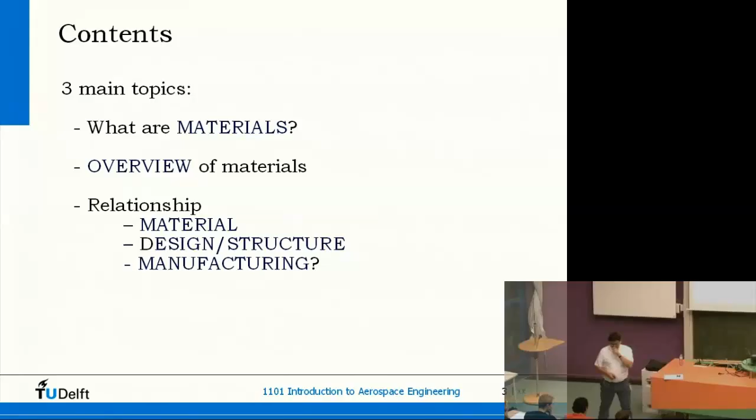Can we bring forward some kind of definition for it? What kind of materials are interesting, and then in particular for aerospace engineering? I also will tell a few things about different aspects of materials, like the properties, and how to design with it and how to manufacture with it.

And then you will see there is a close relationship between these topics.

First question: what is a material? Could you describe a material? Could you give some features of a material?

We need to provide, for one minute, what we need to build something. It provides a sort of skin for a skeleton of a structure that you have. Provides a skin for a skeleton or structure.

My question would be, the skeleton itself, what is that made of? Other ideas?

A collection of matter that makes up something. Collection of matter, yeah, essential things. Everyone knows when we're talking about materials what we mean with it, but how to formulate and how to express it can be rather difficult.

Basically, some specific density, strength, which can best do the job with. Material has strength, density, and so on. Yeah, density, weight, has some properties indeed.

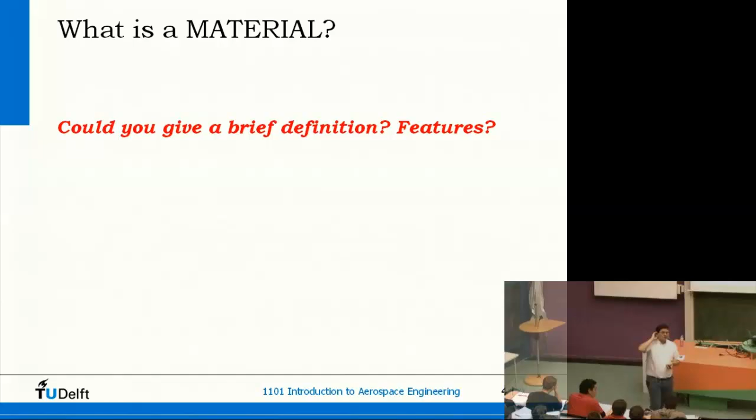Composition of elements, yeah. Well, actually, to give a very crisp and clear definition, that's rather difficult. Also, if you look into textbooks and also in dictionaries, it is rather complicated to find a very nice, very neat definition.

If we talk about materials, we often have to do with substances, with matter. All the properties which I've heard already, strength and stiffness and composition, those are related to that material, and it is not related to any geometry.

That's the difference, for instance, with a structure and a material. A material has substance, has properties, and a structure has substance, has properties, but these properties are also related to its dimensions.

We can talk, for instance, about the strength of a material. We can also talk about the strength of a structure. If we talk about the strength of a material, we can zoom in as far as we can, and still that material has the same property. For a structure, the strength is also related to its size, to its dimensions. A small structure has small strength, a large structure has large strength.

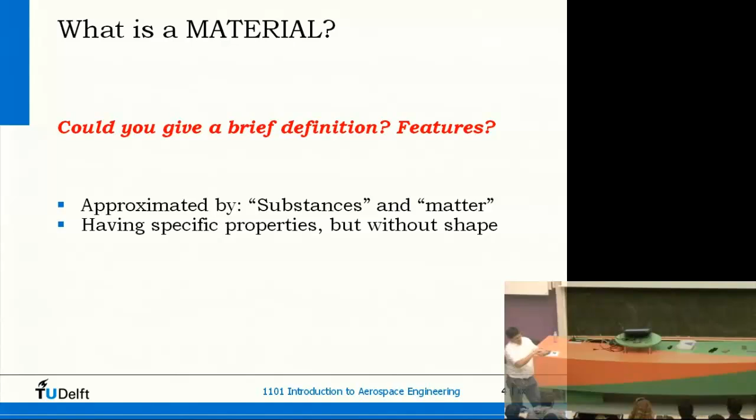Of course, matter always has at least some dimensions, but the idea is that if you talk, for instance, about the density of a material, however I make the size smaller and smaller, the density does not change. The density remains the same. Even if I have a very micro small portion of a material, it still has the same density.

If I have to calculate the weight of a structure, it's a collection of components. Components are made of materials. I will show in a few moments.

Okay, but realize sometimes we're talking about properties, as I will also for materials today. You find more or less the same names for these properties also for structures. But realize that difference.

Okay, well, here is a little bit your answer, I hope. Structures and materials are made from substances. Also, structures are made of substances.

The question is, how? Well, first, if we have materials, the materials are retrieved, for instance, from ore materials like metals, or are made artificially by oil refinements. And these materials can be big blocks, small pellets, powder, whatever form.

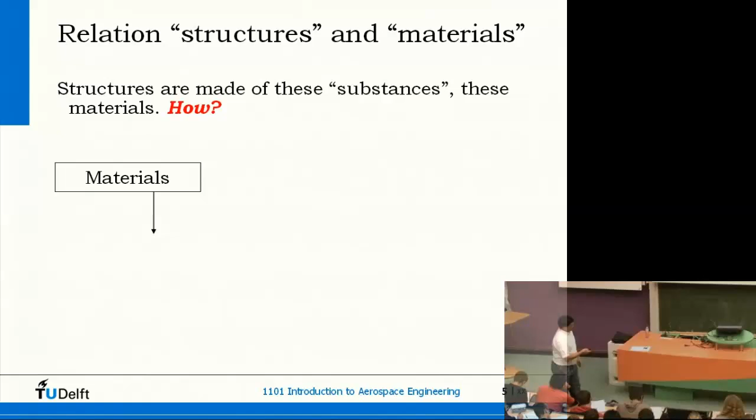These materials are transformed into so-called semi-finished parts. Semi-finished parts, think about, for instance, sheets, profiles, fibers, and so on. From these semi-finished parts, we are going to create components, structural elements.

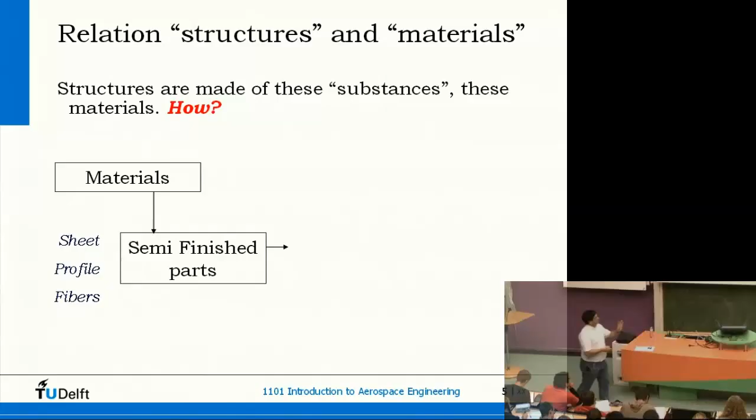And the structural elements can be a stringer, a beam, a sandwich. I showed some of them last time. And as soon as we assemble those, we obtain our structure. So yes, there is indeed a strong correlation between these two, but more or less via this route.

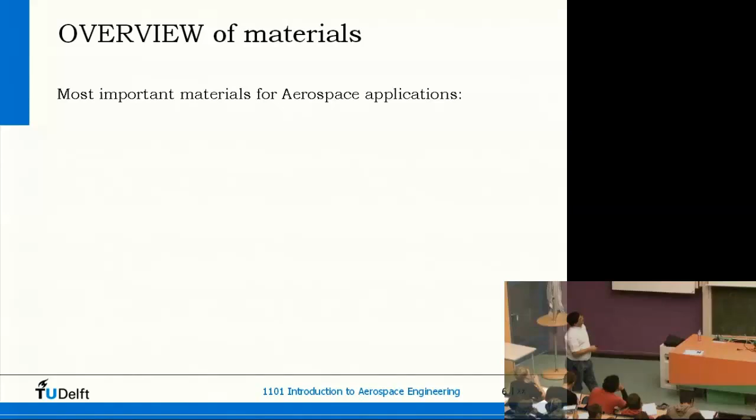Okay, let's zoom in a little bit in materials. If we look at materials, there are a number of main groups, to say so. First of all, we do have the metal alloys. Not all metal alloys are significant for aerospace, as you will see later on, but this is a very big group. It contains steel, zinc, lead, aluminum, magnesium, all kinds of metal alloys.

The other one, often used in aerospace, are so-called composites. A composite means composed of, you could say. It's composed of multiple materials, and I will tell later on how it is done. Fibers and resin, sometimes even metals are included, so then you have a hybrid material.

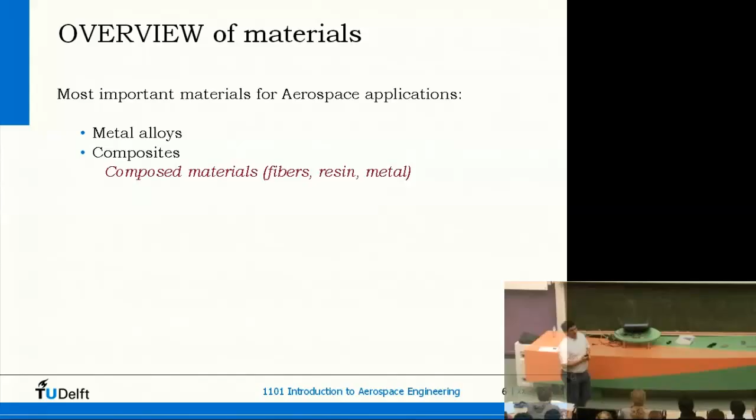Some things are made out of duraluminum. What is that, again? Duraluminum is some kind of aluminum alloy. If you look at aluminum, you have plenty of different alloys. Every alloy has its specific features, its specific characteristics. So things are not purely made out of aluminum. Pure aluminum is only used sometimes as a very tiny surface layer because it is very corrosion resistant. But the structure itself, the load-bearing structure, is always an alloy.

And duraluminum is one of them, but that's an old name. Nowadays we have much better alloys, I think.

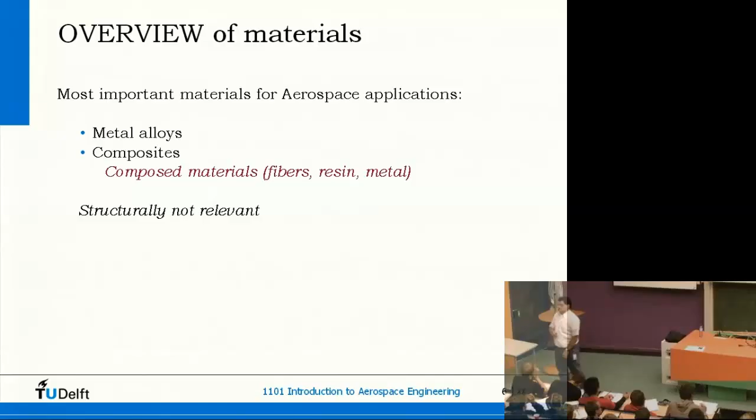Okay, other main groups are, for instance, the polymers and the ceramics. Both are, at least for aerospace, not really relevant, structurally relevant. If you look, for instance, at polymers, you have to think about plastics. Plastics are very nice materials for households, for gardens, for whatever, but you don't use them in highly loaded structures.

Then the strength and the stiffness of these materials is way too low. Ceramics, on the other hand, has another problem. As you can see, it is way too brittle. It is very notch sensitive, and it breaks very easily if you have a load which is not properly applied to a structural part.

I think I don't have any pictures from it, but remember one of the shuttles was damaged by a piece of foam which hit the leading edge of the space shuttle, and later upon re-entry, you saw that the whole shuttle disintegrated because the heat could come into the structure and so on. That leading edge was made of carbon-carbon, and that's a special kind of ceramics. It's very strong, it's very heat resistant, but it is also brittle. So if you have an impact in a very specific way, at a very specific place, it could crack, it could damage, it could puncture a hole in it, and that happens in that case.

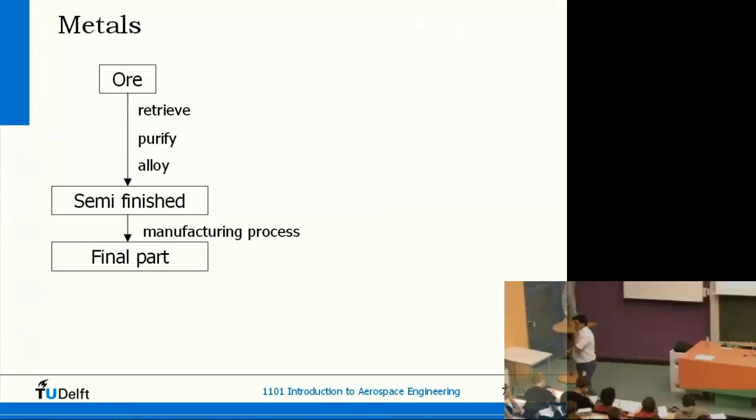Okay, let's have a quick look at some of these materials. First of all, I would like to look into metals. As we all know, metals are derived from ore, which are retrieved from the earth, like this one. Here you see some very big cranes gathering the soil, and later on it is purified and alloyed.

These two terms, purification and alloying - the first one, purification, means that you try to remove all the materials you don't need. So if you have, for instance, iron ore, which usually comes in pellets, small bits of rock where the iron is inside, you try to remove all the non-usable materials, so extract the iron from it. And all the phosphor and sulfur which comes with it, in many cases, should be removed. That's purification.

On the other hand, we would like to add a few things, in many cases, to get the right properties. There could be some chromium or some molybdenum or some carbon, whatever type of alloying elements we need - we put it in. So if we have a molten material, first of all we try to get out all the unwanted stuff, and then put in the stuff we want. That's the difference between purification and alloying.

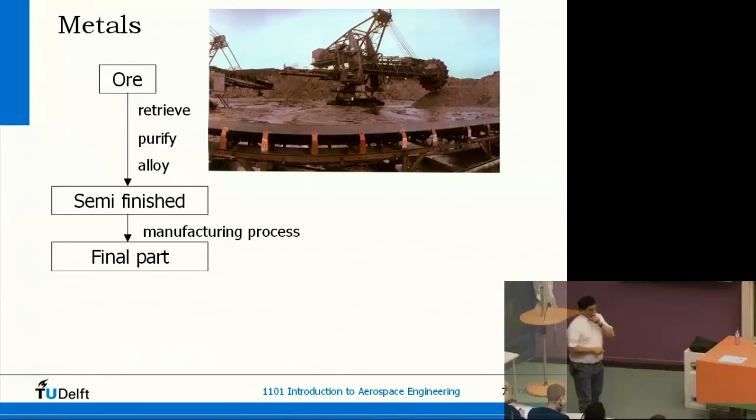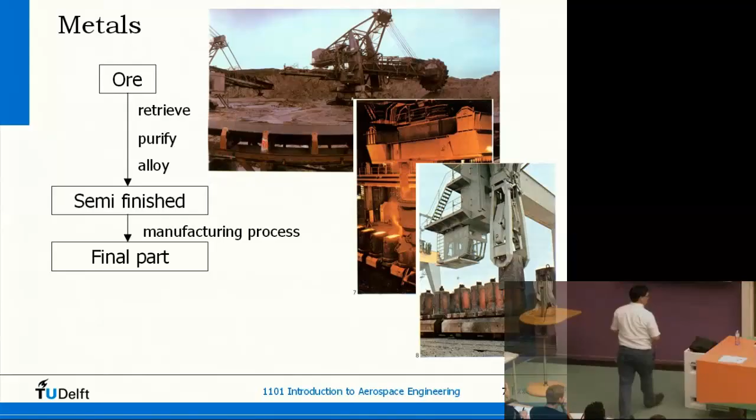After that we do have a semi-finished material, and in many cases it is first cast in very large blocks. Maybe I have to trim a little bit of light.

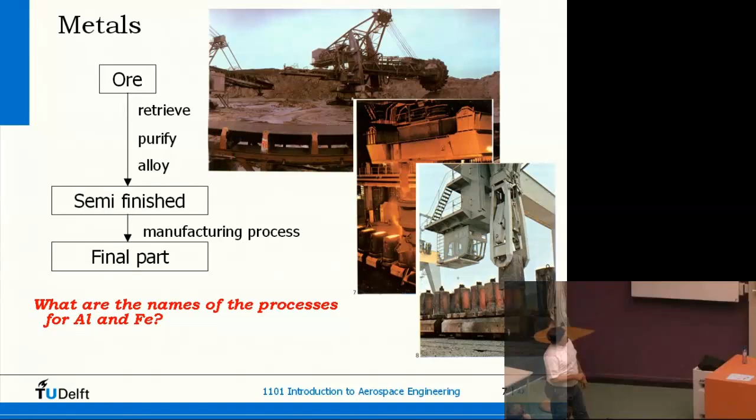Question: what are the names of these processes used for aluminum and for iron? Iron is the blast furnace. Blast furnace, yeah, for iron. I can't remember the proper name for aluminum, but it's electrolysis. Electrolysis, yeah. So indeed, blast furnace and electrolysis.

This is, by the way, a very energy-consuming process. In Holland, what you see for instance in Borssele, we have a nuclear power plant, and that was built there because next to it, in the harbor of Flushing, there was a very big aluminum plant, and a lot of that energy went into that plant. That's why it's also very important to recycle aluminum, because then you can get your new aluminum at much lower energy levels.

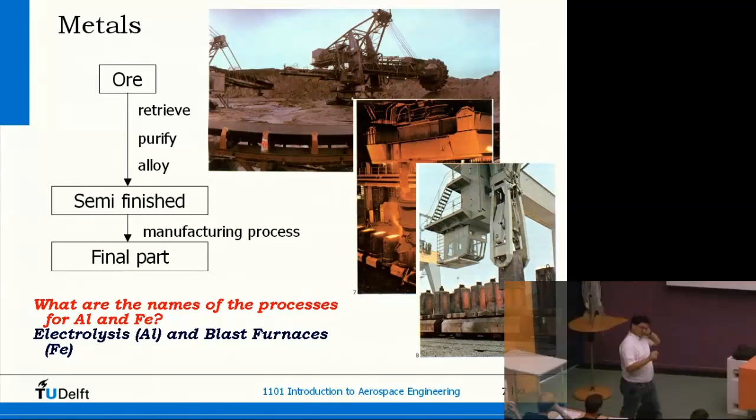Metals have a number of typical properties. First of all, most metals are isotropic. What's isotropic? Anyone know? Again, they keep their shape? No, that's not meant by isotropic.

Actually, isotropic means that the material properties are independent from the direction. So if I take a piece of material and determine the strength in this direction, it's identical as in this direction or in that direction. Same with the stiffness. Of course, the material is also homogeneous, so the density is the same everywhere. That means isotropic. Properties are independent from the direction which I take in the material.

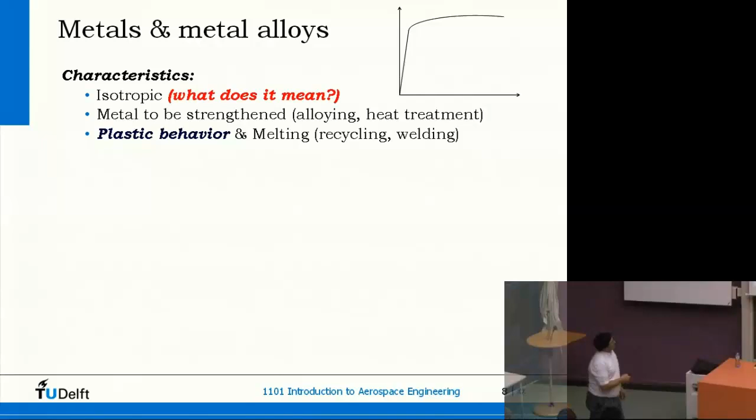Okay, most metals are indeed isotropic. The strength we obtain usually by alloying and heat treatments, putting in materials and doing some heat treatments, that will be told later. Most metals also show plastic behavior, and plastic behavior has a very beneficial advantage because we can shape a product from a flat sheet.

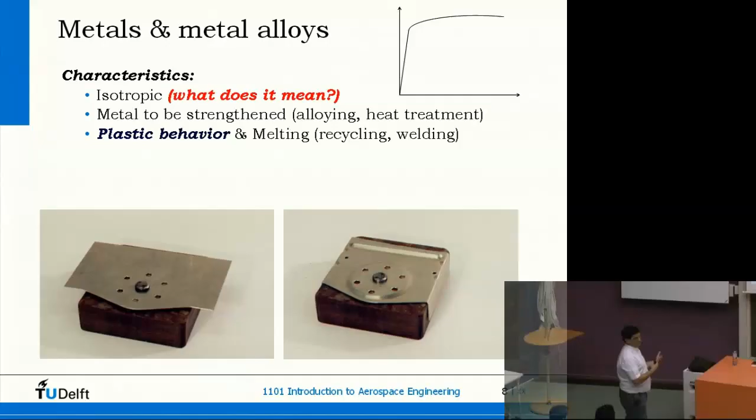Last time we said we operate our aircraft in the elastic area. Please don't go into the plastic area, because then you have a lot of troubles with flying around. But manufacturing is done in this part, so what you see here is related to the plastic area.

Metals can also be melted, can be made fluid, and this also has an impact on, for instance, recycling, welding, and casting. Good processability and often low cost - not all metals are cheap, but a lot of them are cheap.

Next slide, you see some properties of metals. Just to show you, first of all, the density has to be related to the weight. Then the Young's modulus - you already had some information about these properties or not? Some yes, some no. Well, it has to do with the angle of this one.

The steeper the curve, the more resistant the material to deformation, and the higher the Young's modulus - the stiffer the material. Stiffness means resistance to deformation, and the stiffer a material, the larger the force I need to give it some deformation. That's represented with this number. So steel has a high stiffness when you compare it to aluminum, and titanium, for instance, has some intermediate value.

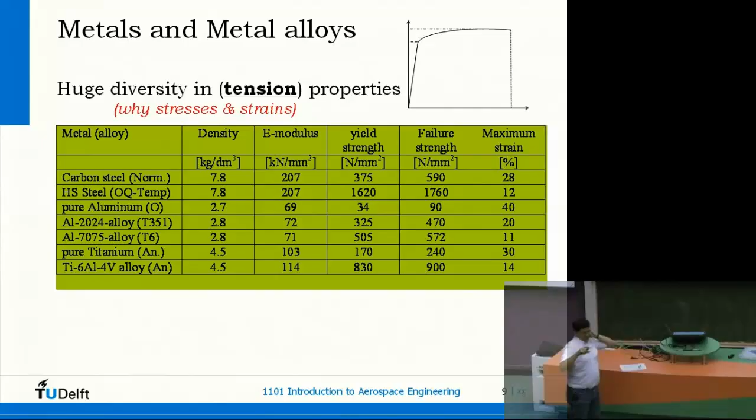Realize this is also only for tension. If you go, for instance, to bending or to compression, you can have different ratios, different formulas for the stress and the density. But for this simple application, pure tension, and I challenge you to look for it at home, simple tension, you can have stress divided by density.

If you do that, you find these numbers, and that's what we call specific values. Now what's very striking here is that, first of all, most of these specific densities and specific stiffnesses are more or less identical. If I go back, here you see large differences, but this large value is also divided by a large density. This is almost around 25.

But more interesting are, of course, these strength values, yield strength and failure strength. And now what you see, high strength is still maybe the highest, but not by that huge difference as on the previous slide. Titanium here is also coming very close, and also this aluminum is coming very close.

So now if I have to design a structure, I will not only look at these specific properties, but also look, for instance, at thicknesses. If I need a specific force and this ends up with a thickness of 0.3 millimeter, that's very thin, so that will be very vulnerable, for instance, by handling or impact. Aluminum probably will be about 1 millimeter if you compare it. Titanium maybe 0.6, 0.7. That's much more rigid, much more sturdy to impact and these kinds of things.

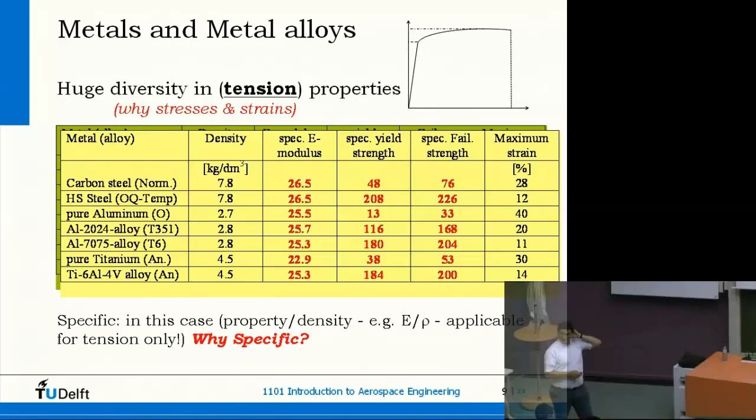So if we compare materials for aerospace applications, we often look at so-called specific properties, not just at the basic properties, but specific properties, because we have to fly. And again, this is for tension. It's the most simple formula. You get these kinds of formulas: property divided by density.

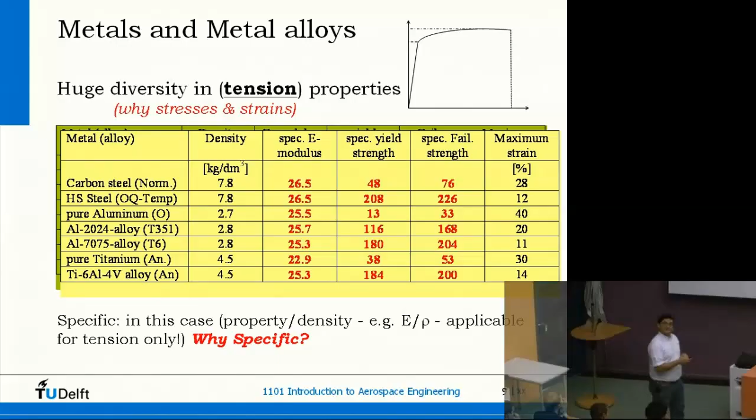Next group is polymers. As I said before, polymers are not very interesting from a structural point of view. Still, I would like to have a quick look at them, because polymers are one of the major ingredients in composites.

Two main groups: thermoplastics and thermoset polymers. Thermoset polymers are made by reaction. You have two components, you bring them together, they react, make a molecular network, and that whole process is irreversible. You cannot turn it around. So once you have cured your polymer, the shape cannot be changed anymore.

That's different with a thermoplastic. A thermoplastic is made of large molecules with some weak bonds between the molecules, some kind of spaghetti. At room temperature it's rigid, you can use it, but heat up the temperature and the bonds between this spaghetti disappear. It becomes more fluid, so you can reshape it, and you can redo that frequently. So thermoplastics can be softened, it's reversible, and it's made of one component.

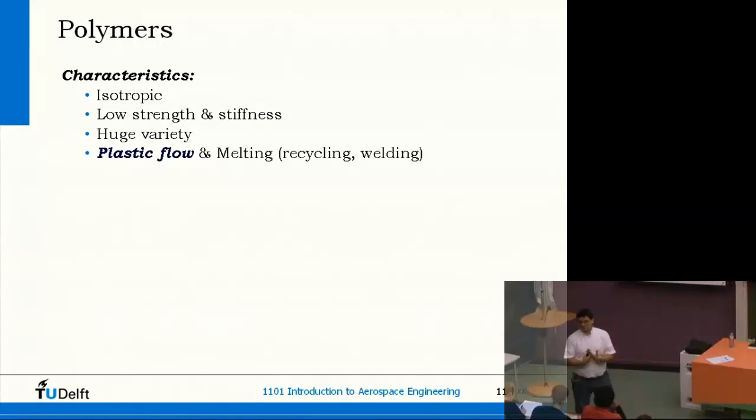Large variety, again also plastic flow. This is, for instance, a setup for injection molding. Here you have some polymer put into it, and then by a turning screw and heat, you force the molten liquid material into some cavities, cool it down, and you have another two parts.

All these plastic coffee cups we have, but also plastic chairs and furniture for the garden, are all made by this injection molding process. Tooling is usually very large, but since you have huge quantities, it's not really a problem. Good processability, and in many cases cheap, very cheap materials.

If you have thermoplastic materials, you bring two together and you have a local heat source like a laser. You can locally melt them, push them together, force them together, and you get a weld. It has not really become fluid, not very water-like material in between, it is some paste material. Whereas in metals you really make it fluid, you really make it liquid. But indeed it is some kind of welding: local heat source and pushing together, and you have a weld.

Okay, polymers, composites. Composites are made of polymers and fibers. Many different types of fibers are available: glass fibers, aramid fibers, carbon fibers, dyneema fibers, and so on, and so on. Boron.

Short, long, and continuous. We mean with short only a few millimeters, with long a few centimeters, and with continuous, well, at least a meter or longer.

Most of the high structural parts, the high performance parts, are made by continuous fibers, because those can be oriented in a certain direction, the other ones cannot. In many cases, in components with short and also with long fibers, the fibers are more or less oriented at random. The direction is not controlled. That's possible with the continuous fibers, not with the short and long ones.

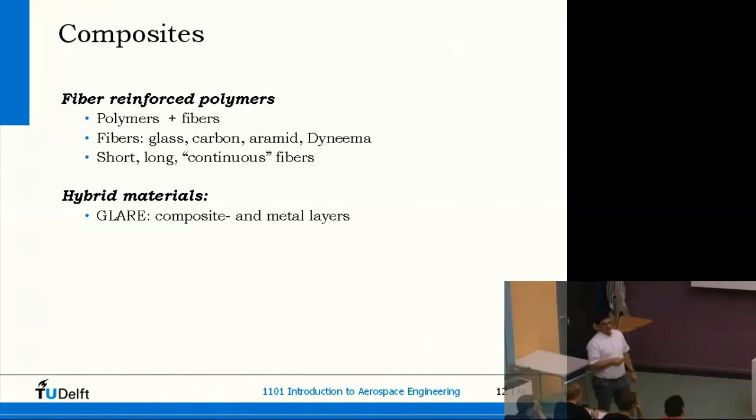Hybrid materials, that's actually polymers, fibers, and metal layers. That's sometimes called a composite, sometimes called a hybrid material.

Here you see some examples of weaves. You have many different weaves in the industry. TenCate, as you can see here, the emblem of the company, is a main player in that domain, in composites. They shifted from cloth to composites, and I think they did it very successfully. Here you see a number of these weaves coming from TenCate.

In many cases, yellow, if there's no resin to it, is aramid; white is glass; black is carbon. So you can recognize most fibers. It's not always true, but as a rule of thumb you could say so.

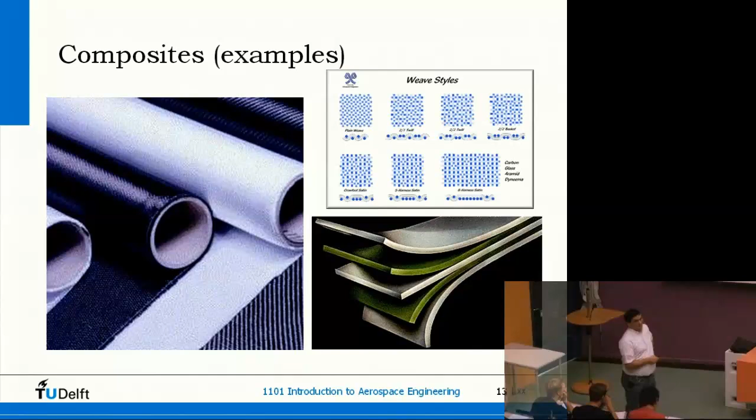And here you see a picture of a fiber metal laminate: metal layer, composite layer, metal layer, composite layer, metal layer. These layers are very thin, in the order of magnitude of 0.3, 0.4 millimeter. So very small.

If you look at composites, I would like to explain a little bit the principles of composites.

Realize the fibers are the materials in there which are strong and stiff, and for the strength and stiffness of a component these materials are sufficient. But as with a rope, you can pull on a rope but you cannot compress it. As soon as you have a fiber, you can tension it but not compress it, because then it buckles in all directions. That's where the resin comes in. The resin is there for supporting, making it able that you also can have compression forces on composites, and of course also to protect the fibers, so that no moisture or whatever can degrade my fiber.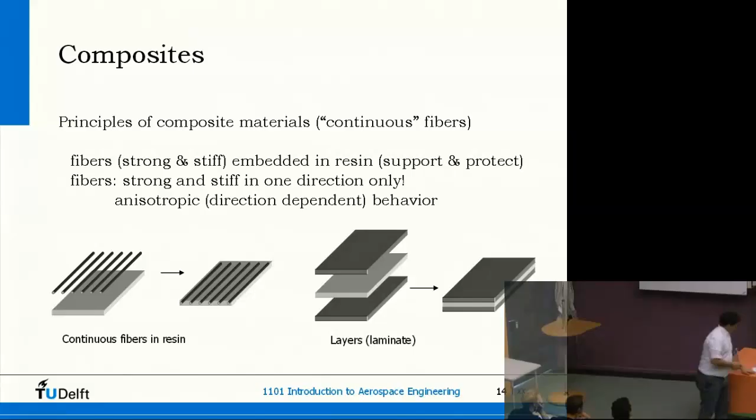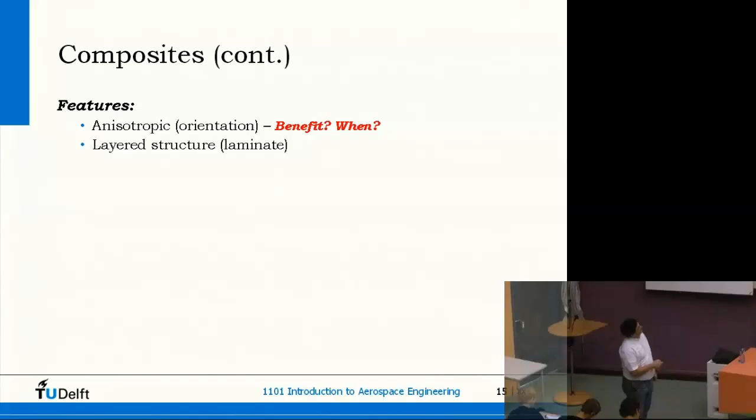Some features of composites: highly anisotropic, meaning the properties depend on the direction you look at. This also has a benefit. If I have a strip like this, and the main load is in this direction, the length direction, I can put most of my fibers there, in that direction. Very little amount of fibers in the other direction for coherence, but most of my fibers can be in that load direction. Then I use my material very highly efficiently.

This is a metal one. It is as strong in this direction as in that direction. In that direction, I don't use that strength, so it's over-designed more or less. That's why composites can sometimes be very lightweight.

It's a layered structure: high strength, stiffness, low density, no plasticity. Processability is also rather good, and you can make nice parts of it. Sometimes made in laminates.

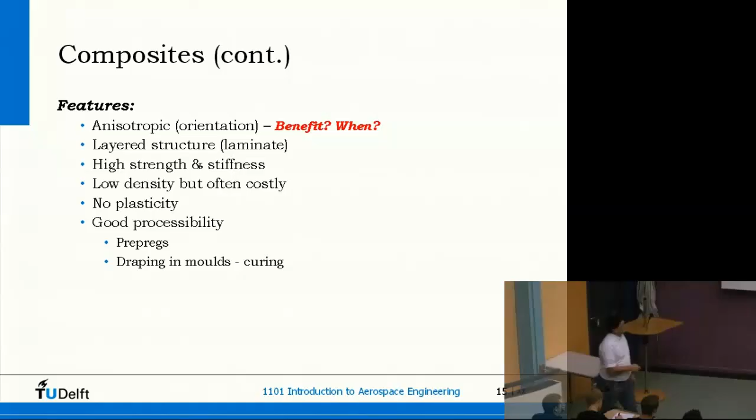Made in laminates, just like metal sheets, more or less. And sometimes it is made in sandwich materials, either a honeycomb core material or sometimes a foam core material. Here you see, for instance, these flaps on an aircraft are in many cases partly or sometimes even completely made of sandwich materials, and here you see how it is constructed.

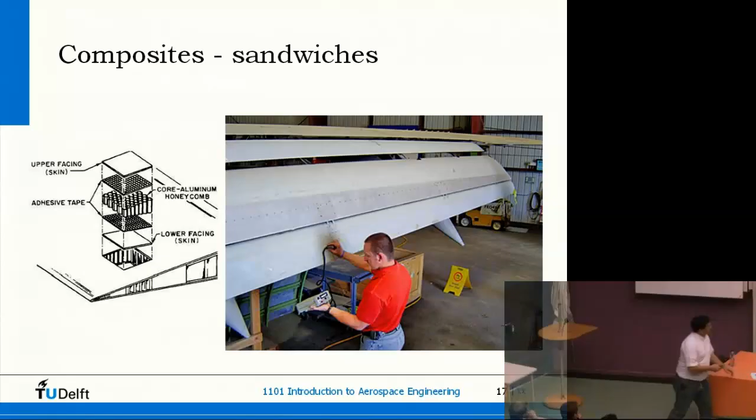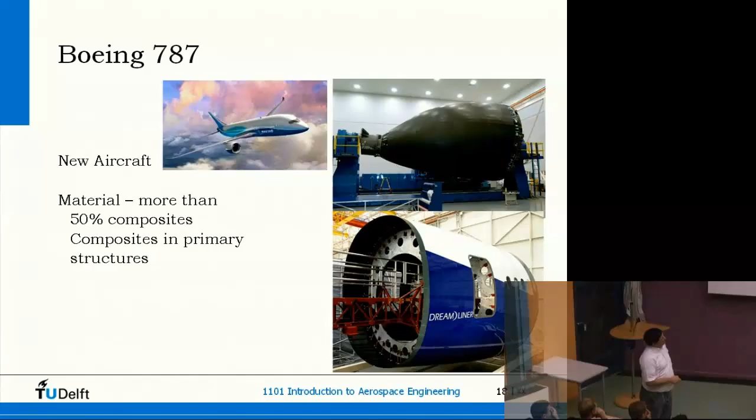Boeing 787 is a new aircraft, entering service within a couple of months I expect. A lot of it is made from composites. The fuselage is almost entirely made of composites. Here you see the inside: all kinds of hat stiffeners in this case, some beams, and so on.

Okay, let's have a look at the properties of these composites. I put in this one several materials. First of all, an epoxy. Epoxy is a thermoset polymer, it's polymer only. And when you see the Young's modulus and the strength, and compare that with the aluminum values here, you see what I meant when I said these materials have very low strength and stiffness properties.

PEEK is a thermoplastic material. Polypropylene is also a thermoplastic material. You can see all these materials have low values for strength and stiffness. Here you have two materials, two metals to compare with, because we have seen them a few slides ago.

And these are two composites, one a glass composite and one a carbon composite. Both have unidirectional fibers, so all fibers are running in one direction, and we are testing the material in fiber direction. So realize, as soon as you go to a cross-ply material, you have to divide these values by 2.

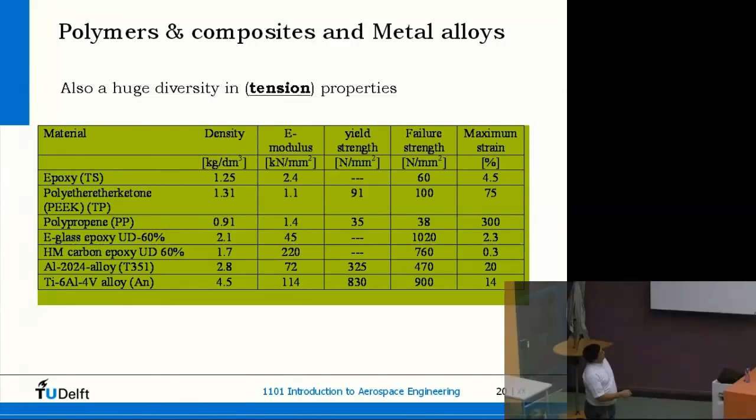Well, if you compare it, you can already see that glass is very strong, carbon is a little bit less strong, but that changes when we go to the specific properties again, as you can see here. And then you see that these composites can have very high specific values, both in stiffness and in strength.

Again, realize we are talking here about unidirectional materials. As soon as you have to make a component which is loaded in more than one direction, these values will drop. But nevertheless, you have potentially very high valuable material.

Again, the yield strength of these materials - composites don't have a yield strength. If you have a composite, those are more or less elastic until they fail. So usually these composites don't have a specific defined yield strength. Yield strength is typical what you often see with metals when you go from the elastic into the plastic area. But it is not happening in composites.

The maximum strain, that means how far I can stretch a material before it fails. And there you see one of the weak points of composites. It is very brittle. It has a very small amount of deformation possible before it fails. That's for metals much better.

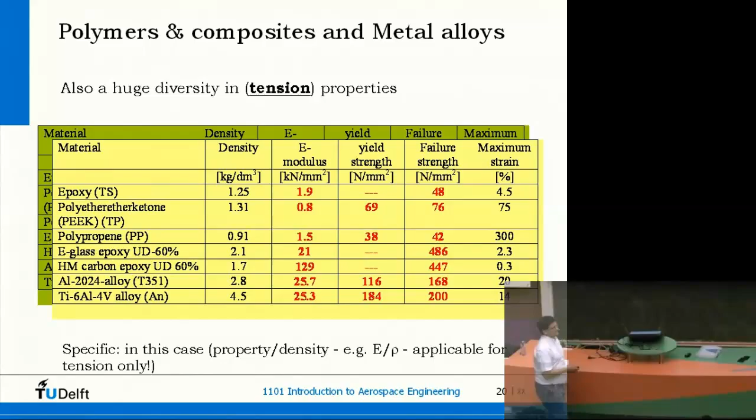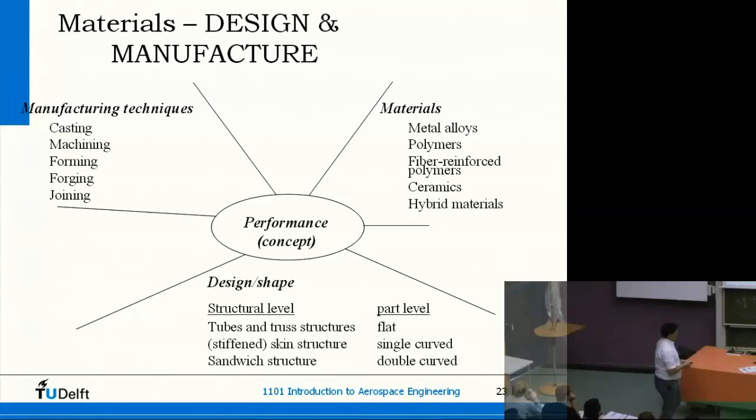Well, I just will show quickly a few of them. For metals, for instance, we can have casting, forming - those are two very famous and very favorable processes. Here you see, for instance, this aluminum casing for some wheels in there. This one is made by a casting process. A metal can become liquid if you heat it up, and we can pour it into a die, cool it down, solidify it, and then we have a shape. And you can see we can have very complex shapes.

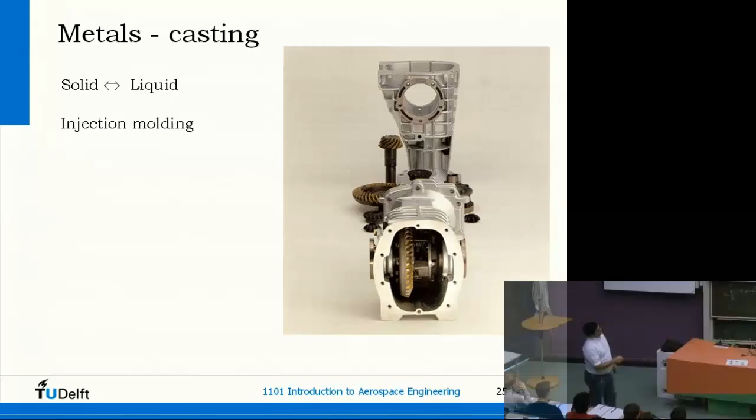Why isn't it possible to cast some brackets? You can also cast it. This shape can also be cast, can also be forged, but then you have to balance, you have to make a trade-off, which is most beneficial from point of costs, from point of performance. Yeah, but it's possible, you could also cast it.

How would the way of manufacturing affect the performance? Because in the end, if you cast, for instance, if you would cast a structure like this, the microstructure is different. And that can have an impact on, for instance, fatigue, for instance, on corrosion. So, from corrosion point of view, fatigue point of view, this could be better. Not always, but this could be better.

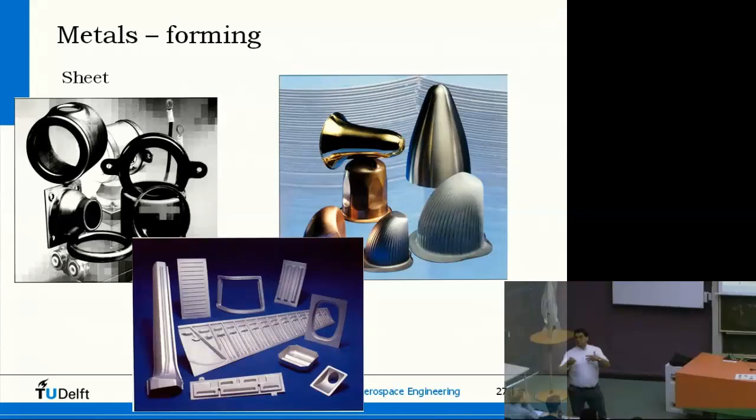Forming, all kind of different forming operations, starting with a flat sheet and then forming it into all kinds of shapes. And finally, a multitude of ways to fasten each other, to assemble structures from these components: riveting, welding, forming, squeezing, and so on.

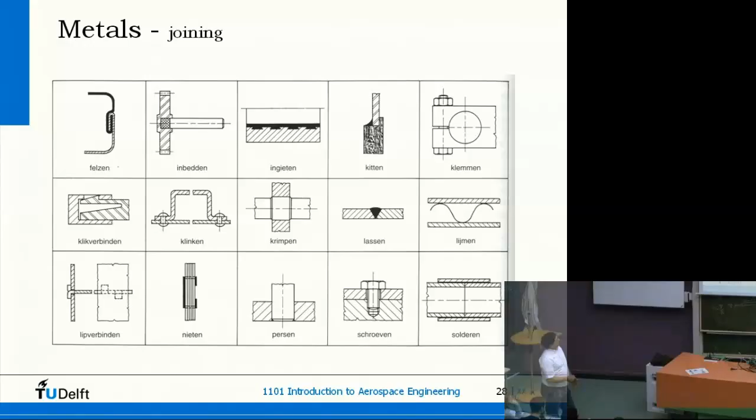Composites are different. Composites are in many cases coming in layers.

Layers of fibers in weaves, fabrics. Sometimes the resin is already brought onto that weave, and then we have a so-called pre-preg, pre-impregnated fabric. What we do in composite manufacturing is building up a structure by putting layers on top of each other.

For instance, in the layup process. Once the whole stack is completed, you put it into a foil, into an autoclave, and cure it. After 1 or 2 hours of curing, you have a solidified, cured product which can be used in an aircraft.

Here you see parts which are made by press forming, just like metals. Before this press forming operation, we have flat laminates of thermoplastic materials. These are cut into the right pre-shapes and then press formed. Before the forming operation, we heat the material to make the thermoplastic soft, so it can form. This is only possible for thermoplastic materials.

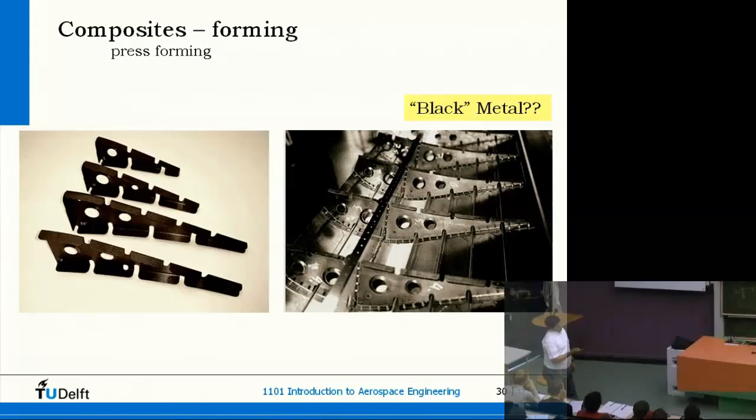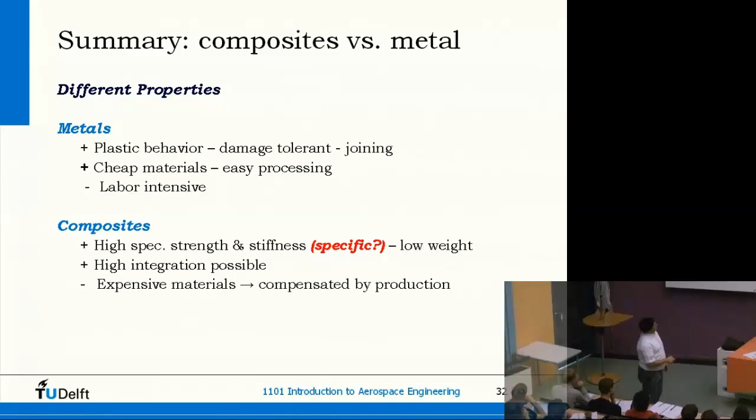Summarizing, if you look at the different properties, that has an impact on how to produce it. Metals have plastic behavior, and that means you have also damage tolerant joining, and you can have forming operations. Composites have different kinds of properties, and here you see some impacts on manufacturing: sandwich, different cells, laminating, and so on.

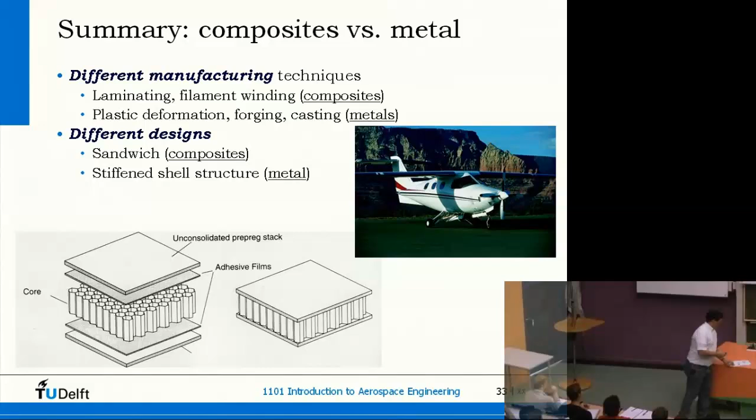Okay, questions so far about this one? Realize the main message I brought in the last 5 or 10 minutes was that there is a link between your material, the shape you can get, and the production process.

What type of exam questions can you get, or is it more basic knowledge? For me, most important now is understanding. So if I have a multiple choice question that says casting can be performed in metals, composites, hybrid materials, you should be able to say okay, it's okay for metals, but not for composites, as an example. Or I would ask you to mention at least 2 production processes for composites. Then you could say layup and filament winding, and so on.

This one is a little bit about exploring the limits. I forgot here to mention what chapter it is, but I will put it on later. When I put it on Blackboard, there will be some Anderson chapters or paragraphs in there.

This is about X-planes going from subsonic to supersonic, and if I have some time, also a few words about high temperature materials. X-planes means experimental. After the Second World War, there were a huge number of experimental planes, and I think they are still going on. Each of these planes has some specific goal to investigate some specific property.

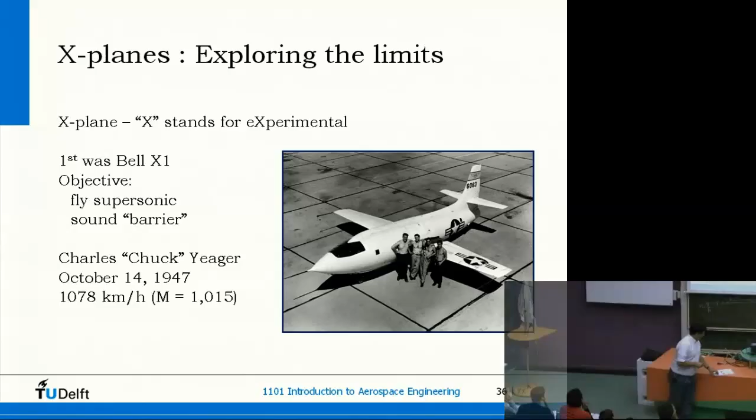One of the first, and which was most famous, I think, is the Bell X-1, which you can see here, the first one who flew faster than the speed of sound. They conquered there the supersonic, or so-called sound barrier. You see, it's only just beyond speed of sound.

As I said, a lot of these X-planes have been produced after the Second World War. If you look at this, you can see a large overview of all kinds of X-planes. I think one of the latest, maybe already obsolete, I don't know, is somewhere around the X-53 or something like that. I will show a few of them and mention how they use them to explore the limits of flying.

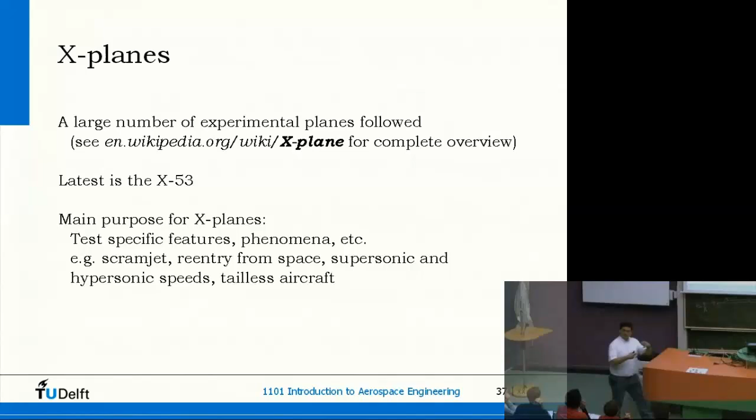Another one, in '59, more than 50 years ago, that's the X-15. You see a picture of that aircraft here. So far, the aircraft with the highest Mach number, 6.7, and also very high altitude. Temperatures on this aircraft exceeded 650 degrees Celsius, so that's not flying around anymore with aluminum. You need to have steel or titanium alloys. Very expensive aircraft, again.

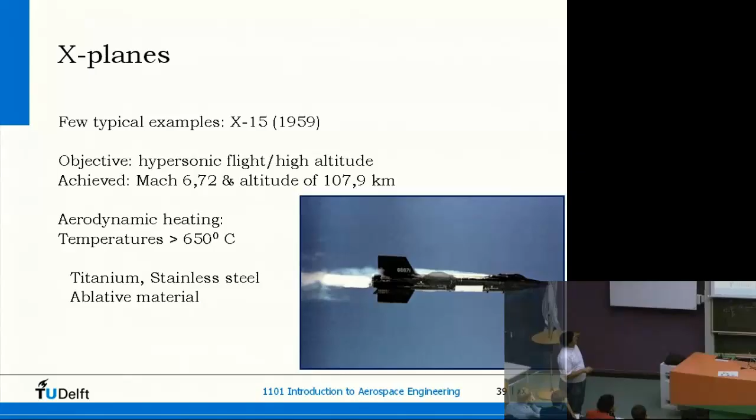Composite, however, you can tailor. You can tune the materials, the properties you like. So in this case, the structure has been tailored such that even in a forward swept wing, with bending up, you still have a forward twist of your wing box. That's possible with structural composites, and not with metals.

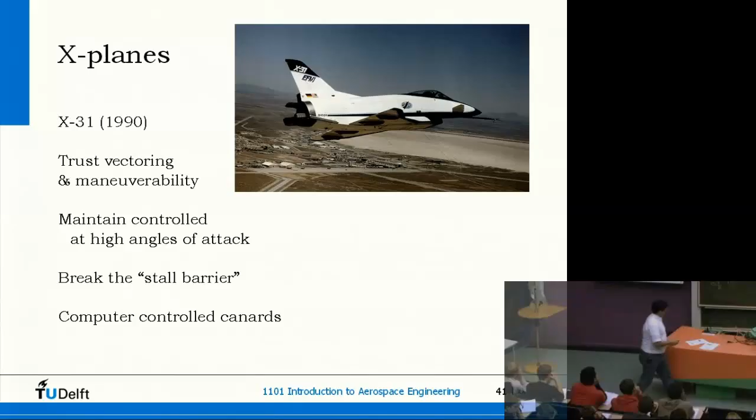X-45, that's an unmanned combat vehicle, one of them. I think there are several X-planes in this domain and still developing further. Well, that's just a very rough overview of X-planes. I would go back to the first X-planes, because then we were struggling with the speed of sound, the Mach number.

Who built the X-planes? That's usually different companies. Sometimes it's Grumman, sometimes it is Rockwell, sometimes it is Boeing. Usually there is some kind of competition between companies.

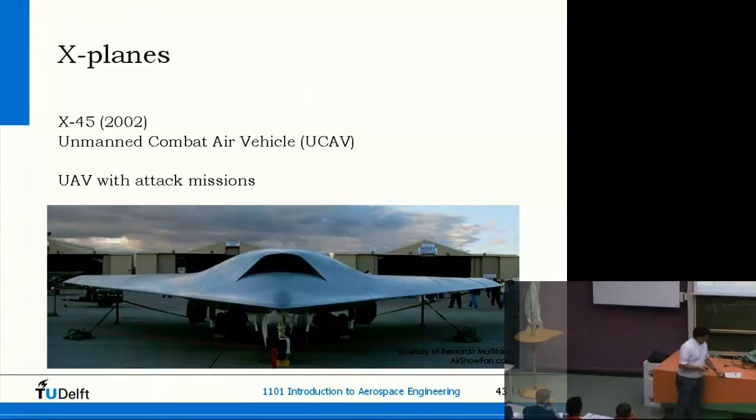Speed of sound. For the speed of sound, we often use the so-called Mach number. The Mach number is defined as the velocity, the true airspeed of the aircraft, divided by the speed of sound. If this number becomes 1, we are flying as fast as the speed of sound, and then we have a sonic flow - we are flying sonic. Beyond that, it's supersonic; below that, it's subsonic. Well, this is one very strict division.

We often use also a division like this: you have subsonic below Mach number 0.8-0.9, transonic in the regime of 0.8-0.9 to 1.2, supersonic from 1.2 to 5, and hypersonic beyond that.

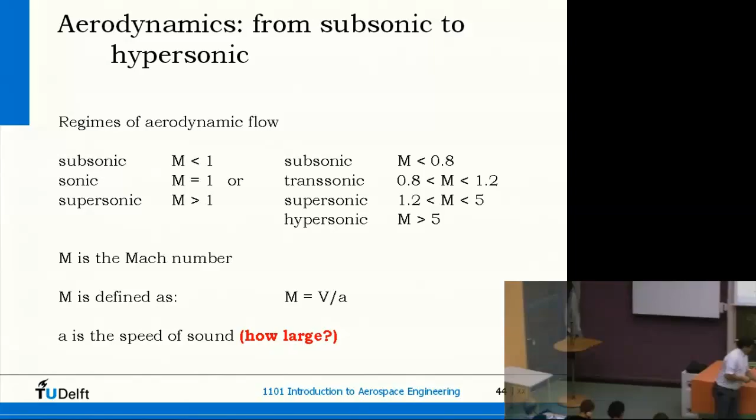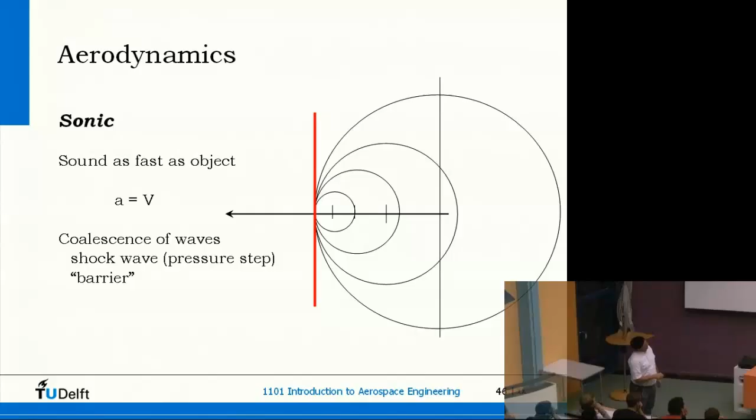As soon as we are flying Mach 1, you see a coalescence of these circles, and you get more or less a shock wave here. The pressure before it is lower than the pressure after it. And it becomes even more significant when you're flying supersonic - you get these so-called shock waves, and the shock wave is nothing less than the pressure difference.

So when I'm standing on the ground and an aircraft is passing by, flying faster than the speed of sound, I hear a bang, and the bang is a pressure difference. Just before hitting me, the pressure is lower. As soon as this passes, the pressure is slightly higher. And that gives me a bang in the ears. So we perceive it as some kind of bang.

You have a coalescence indeed of waves. You also see here an angle, mu - the speed, mu. What's the proper English pronunciation? Mu. Okay, mu. From now on.

Okay, mu. Well, here you see the velocity. Here you see the speed of sound times a time interval. And this angle is representing, of course, my Mach number. The sinus of that mu is the reciprocal of this Mach number.

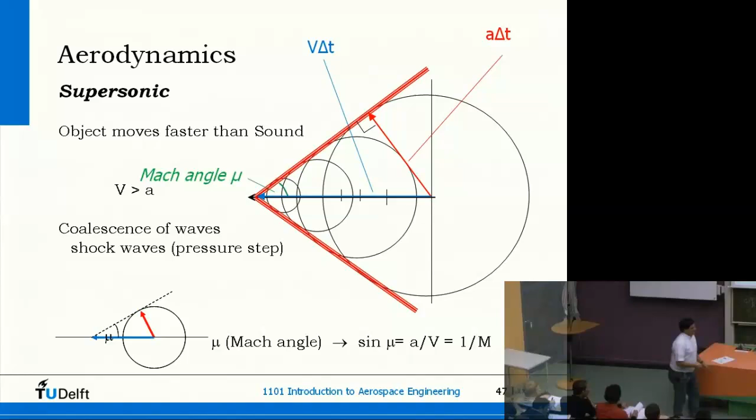Seems very simple, but sometimes you can also use it to calculate speeds. This is an aircraft flying through the speed of sound. And due to pressure differences before and after, also differences in... no, that's too complicated, but you will see some condensation behind the shock waves. That's due to the difference in pressure and density and so on, temperature. Temperature, pressure and density changes over that wave, and that makes it visible like this.

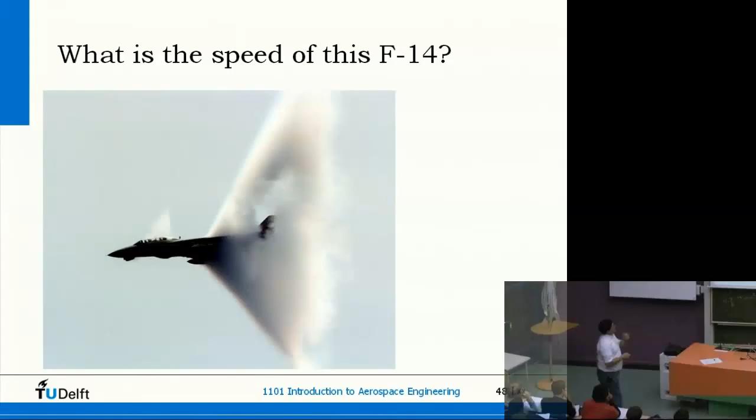When you see this, you could ask, what is the speed of this aircraft? And actually what we use is the same mu as we have discussed on the previous slide, because there's an angle of about 30 degrees. So our mu is about 60 degrees. The sinus of 60 degrees is about 0.87. That means the Mach number is 1.15.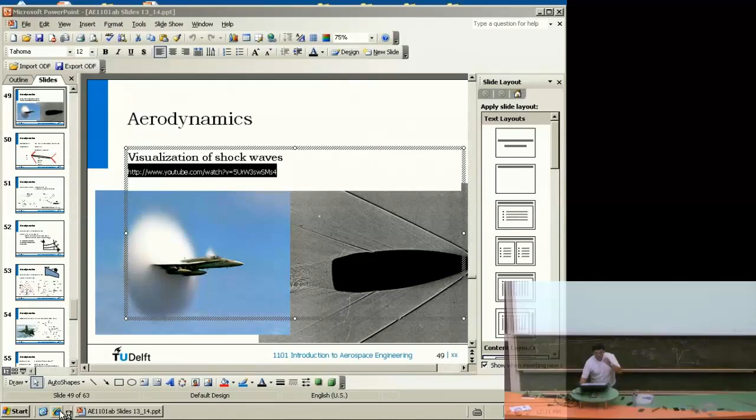Yeah? Again? Is the sound barrier is this cloud all the way existing, or does it... no, go back please. Maybe I can... try to see where I can get it. Come on. Once more.

I hope that answers your question. Sir, does that answer your question? Because an aircraft is not just going through some shock waves. No, it's flying around and dragging with it these shock waves.

So his question was, do you see this cloud only once when it passes through? No, it takes it with it. And of course it depends on the composition of the air whether you see a very significant cloud or not. I can imagine that when he's flying at higher altitudes, but then the moisture in the air is much less or drier or whatever, you do not always see such a cloud.

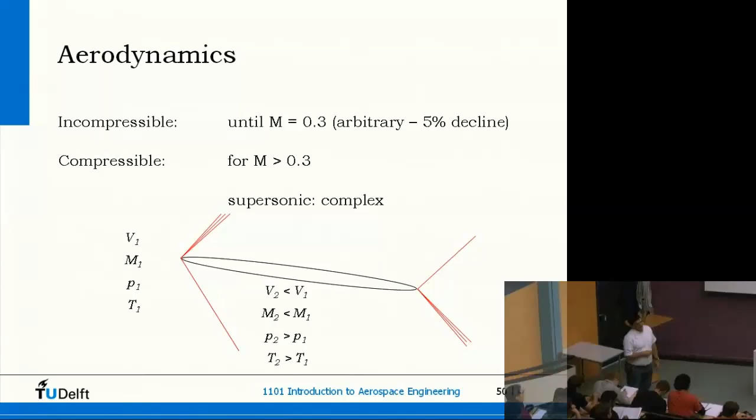Just a few words more about this. This is what happens when flying faster than the speed of sound. We have seen before that at very low speeds you can regard the air as incompressible, but that's not possible if you are flying faster. So let's say up to 300, 350 kilometers per hour you can regard it as incompressible. For most general aviation that's the case, but for civil aviation and military aviation you are always in this regime and you have compressible airflow.

This is what happens: you have a speed and a Mach number, a pressure and a temperature before and after a shock wave, and you see these are changing. The speed here is smaller, so also the Mach number. The pressure is slightly higher, and the temperature is somewhat higher too. So after a shock wave, pressure and temperature increase and speed decreases.

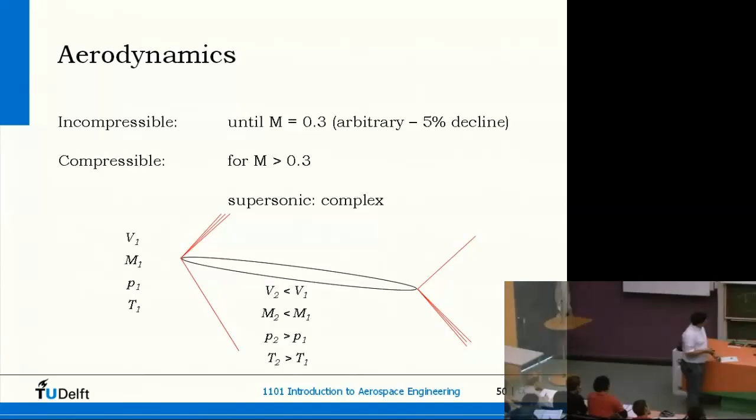Sometimes you can also experience shock waves even when flying subsonic, depending on the airflow over your wings. Very close to Mach 1, you can already have some supersonic flow closing with a shock wave. Or if you try to fly with profiles typically designed for subsonic speeds, you can get a very big shock wave in front of your wing, and these are very detrimental for your drag.

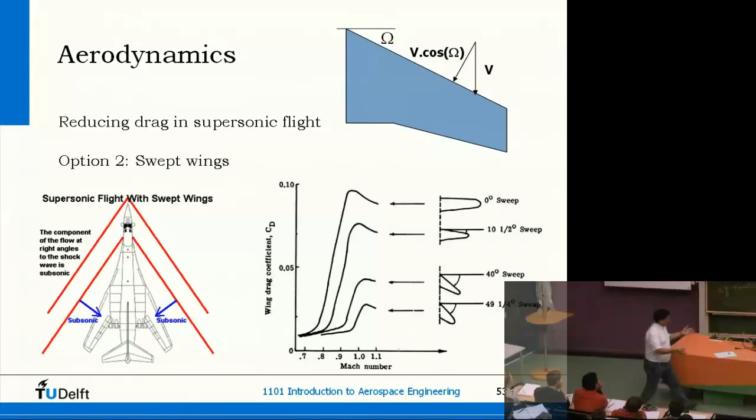Here's a similar story. Let's have a look: these are points for this configuration, these for that configuration, and here are the points for this one - typical aircraft like the Tomcat and Tornado, which have variable sweep. In the transonic regime, close to Mach 1, you have in many cases a very high drag. At supersonic speed you may have a lower L/D ratio, but a much higher speed, so the dynamic pressure compensates for that.

I don't know how many people have seen this aircraft in real life, the Starfighter. If you come close to it, you see how astonishingly small its wing surface is - really a very small wing. That means for takeoff and landing you need very high takeoff and landing speeds, and also very long landing strips, usually in the order of 2 to 3 kilometers. Nowadays you see new aircraft like the F-16 and F-18 that can take off within a much shorter distance, but they have an increased wing surface - this aircraft has an astonishingly small one.

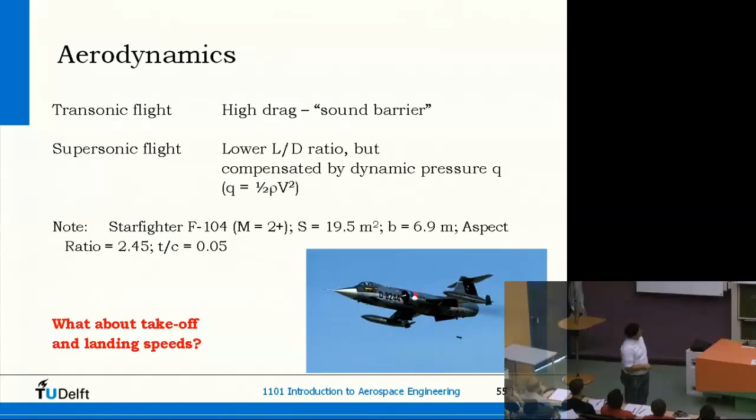Okay, a few words about high temperature materials, if there are no questions about this story on shocks and Mach numbers.

We have seen already this aircraft, that was the X-15, which was flying through the air with very high speeds, Mach 6 and beyond. It had indeed very large temperatures, 600 degrees or even more. And that means we cannot use aluminum anymore.

We need to have stainless steel, titanium, and so on. Here you see some of these materials: aluminum, titanium, stainless, Inconel. In particular, titanium is for those applications a very good material. It has high strength, high temperature possibilities, and is still not too heavy. The density of titanium is 4.4, 4.5, whereas for stainless steel and Inconel it is 8 or beyond.

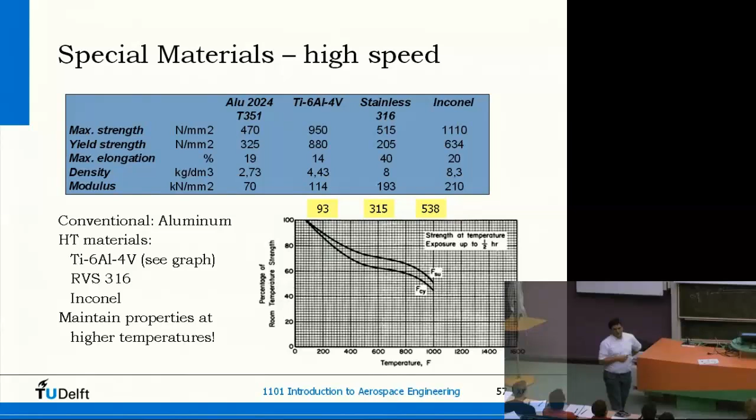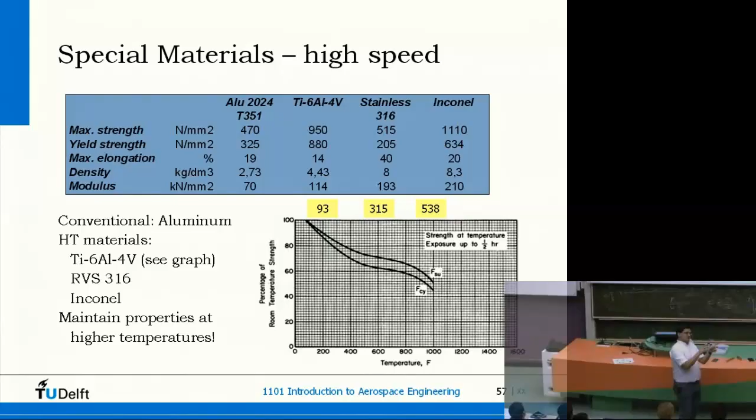So that's very heavy. Inconel is a special steel, nickel, chromium alloy. So it's a mix of these elements. And that's often used as a special high temperature alloy for space applications or for applications like this one.

We often have to look at the temperature relationship. Here you see, for instance, the temperature relationship of titanium alloy. This is about room temperature, and here this is about 540, 600 degrees. So the strength decreases by a factor of 2. You have to keep that in mind if you are designing an aircraft like that.

Another one, the Blackbird. It is made of titanium for more than 90%. It flies at Mach 3, so very high speeds. Temperatures of the leading edge up to 400 plus degrees. So that's also rather hot.

I said titanium is a very nice material from a properties point of view, but from a manufacturing point of view, it's really a very difficult material. It is difficult to form, difficult to machine, and welding is not that easy either. So indeed, titanium is an ideal material, but from a manufacturing point of view, costs a lot of headaches. But as you can see, we can manage. We can make these aircraft and fly them around.

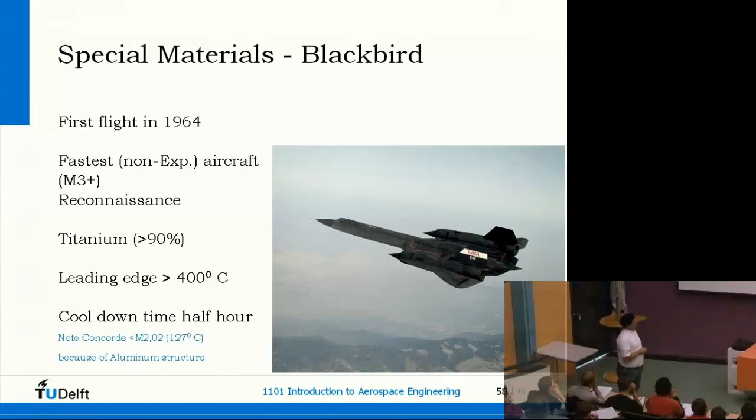Leading edge of 400 degrees is still not capable for aluminum. If you look at the Concorde, you see in the notes that it was made for a Mach number of just over 2, because in that case the maximum temperature could be kept about 120, 125 degrees, and in that case we could still use aluminum structures. So there's a decisive link between the temperature and the use of materials.

Well, if you go into space, you have different requirements for materials. One of them, for instance, is heat shields. These are completely different materials. In the early ages, they used so-called ablative shields, meaning that when it enters, a little material dissipates, but by that dissipation a lot of energy was consumed by the sublimating surface. And that is still used nowadays, and was also used in the space shuttle, for instance.

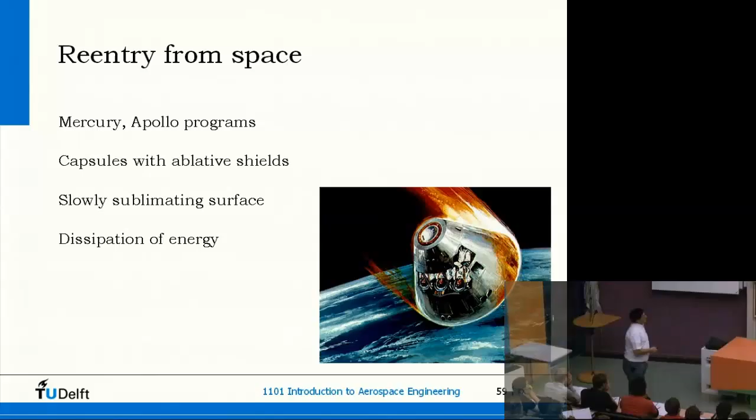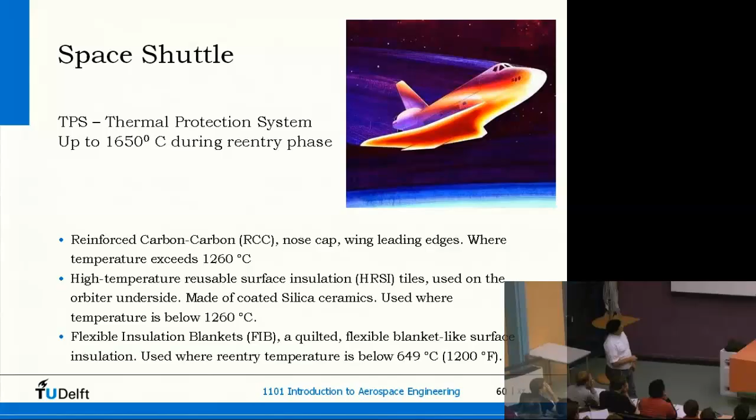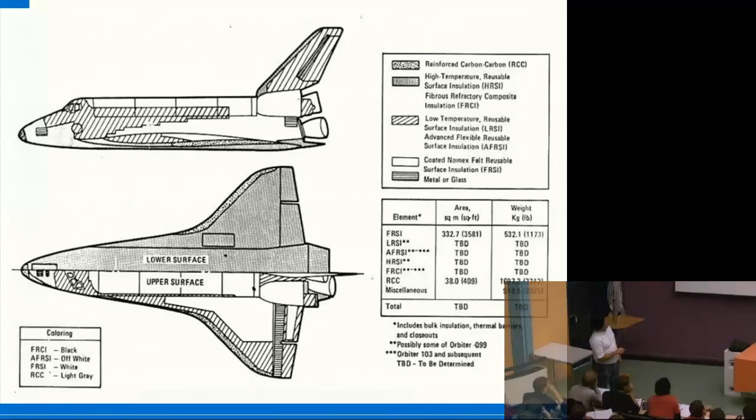Okay, so that's something about these special materials. I'm at the end of this second hour. First I started with some explanations, some speed records, some altitudes, but that means also flying at high speed you need special materials, and sometimes very weird materials.

Questions from your side? The airplane that holds the record is the X-15.